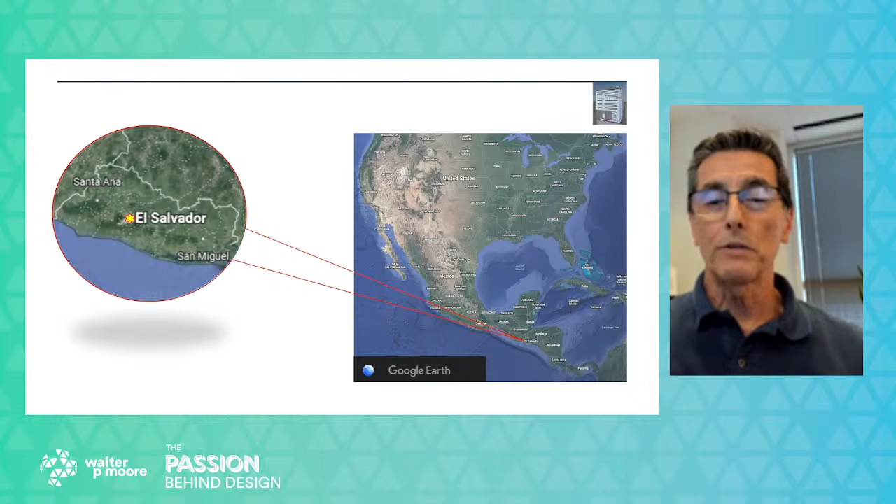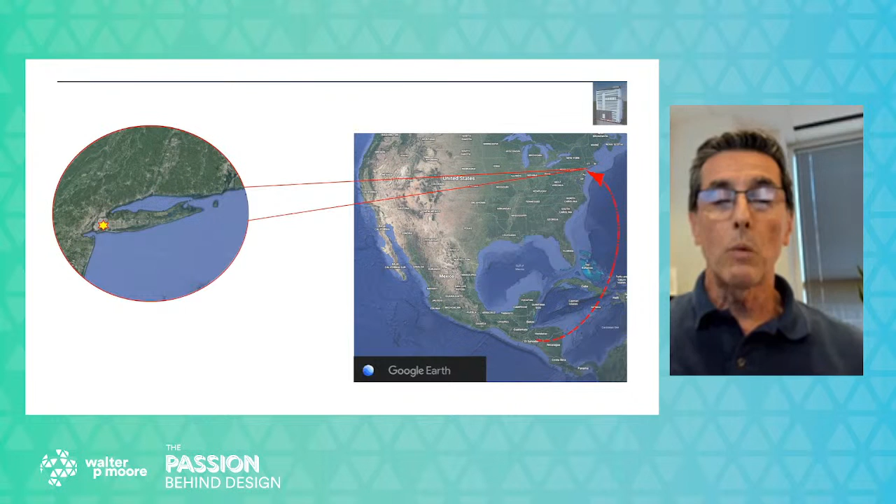Physics and math have always been of interest to me. My uncle once told me that math is the universal language. With math, one can describe and explain what happens around you. And that statement puzzled me. I was always, like I said before, fascinated with high-rise buildings, especially in New York. So after high school, I moved to New York, where I completed my bachelor's and master's degree, and was very fortunate to work in New York with great mentors whom I credit a great deal for my achievements. I worked there for close to 10 years.

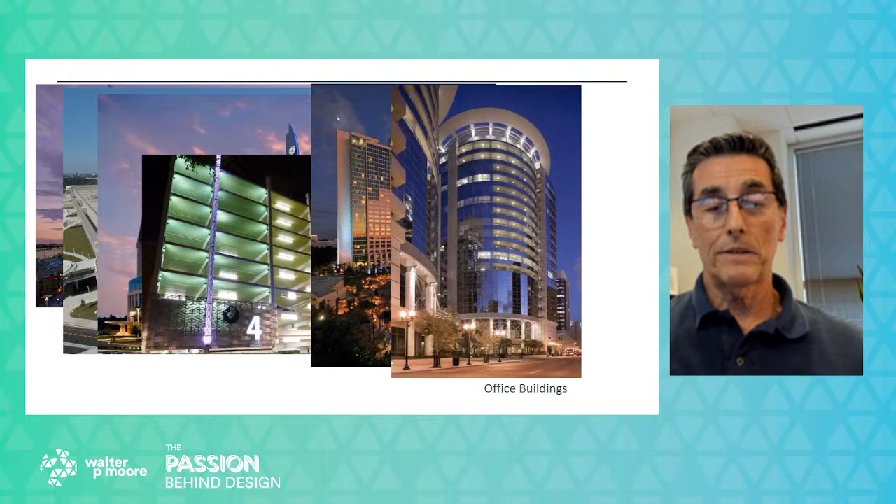And from there, my trek ended in Tampa, where I was fortunate to be hired by Walter P. Moore to work in the Tampa office. And 27 years later, I can still say that these have been the best 27 years of my career, designing buildings, doing what I love the most. So through the years, I had the fortune and joy of designing several types of buildings. I've designed sports arenas, convention centers. I've designed hospitals and healthcare facilities, parking garages, hotel resorts, and office buildings. And my collaboration on projects spans across the United States, Canada, Central America, Dubai, and Japan.

I often tell my children that when I see a project that's been completed, where I collaborated, it gives me a great deal of joy and pride. And I hope that if any of the students that are watching become engineers, architects, or contractors, they have the same sensation when they experience their work.

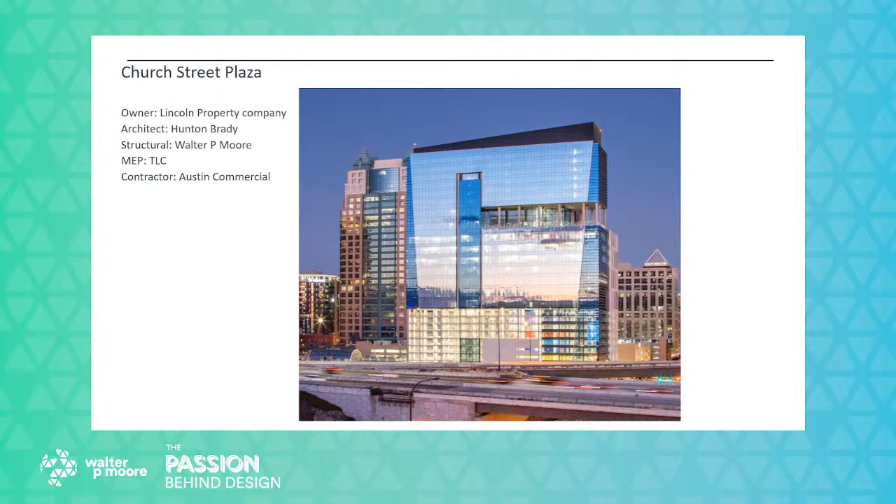This presentation is prepared specifically for the ACE mentorship program. For those of you professionals who are watching this presentation, it may be a little watered down to you, so please be patient and sit down. For those young, bright students interested in science and engineering, I have tried to keep the topic simple yet interesting, with the intent of sparking the curiosity just enough to consider following this path. The intent of this presentation is to bring awareness that we can solve problems, simple and complex, only if we channel our attention on breaking down these challenges into simple, basic, recognizable steps.

I'd like to give first, before we get started, special thanks to the team who helped deliver this incredible project. And I will start with the owner and developer, Lincoln Property, who planned the project, a company that understood the needs in the Orlando market and took a leap to deliver this project that is close to full occupancy now. Also, Hunton Brady Architects, who partnered with Lincoln Property and converted the vision into an exciting design and functional facility.

And also challenged the design consultants with this incredible puzzle. Walter P. Moore, of course, who collaborated with the architects and the other consultants to design the building skeleton that helps this icon stand tall and proud across the Orlando skyline. TLC, the mechanical, electrical, plumbing consultants, who in metaphorical terms design the blood vessels and the internal organs that make this building breathe, live, and light up.

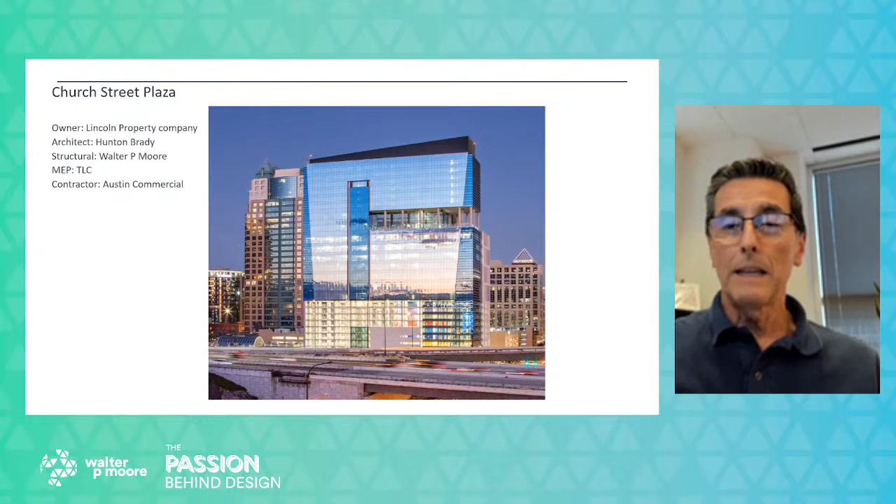And of course, last but not least, Austin Commercial, the contractors, who had the monumental task of taking all of our design solutions that were documented in drawings and computer models and converting them into what you see today in the Orlando skyline. Like I said, this is an exciting project delivered in a tight, constrained environment. The building's property line is only within about 15 feet of an active railroad track. And vibration from the train has always been something of a concern, especially when you build right next to it.

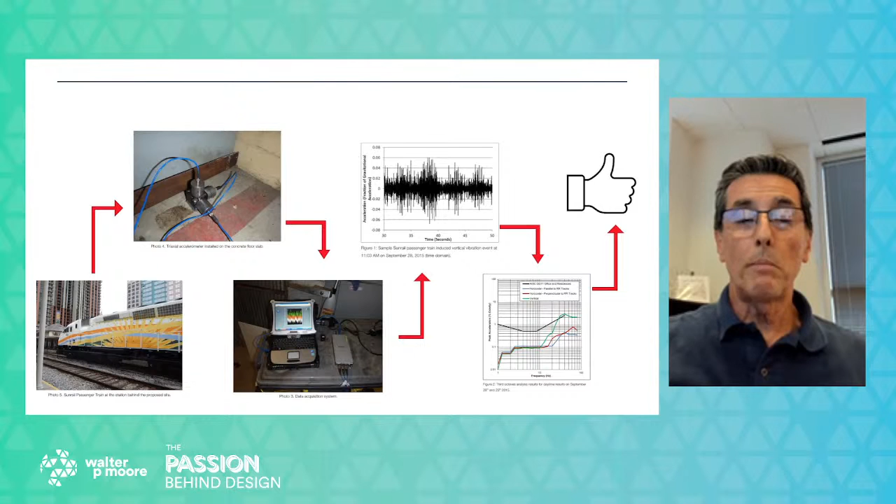So during the early phase of design, our forensic engineering group installed what we call a triaxial accelerometer. This is equipment that senses vibration in all three directions, and it was placed within the building footprint. The intent was to monitor vibration from the passenger and freight trains for several days. That information was compiled and fed into a data acquisition system that produced plots of those train-induced vibrations.

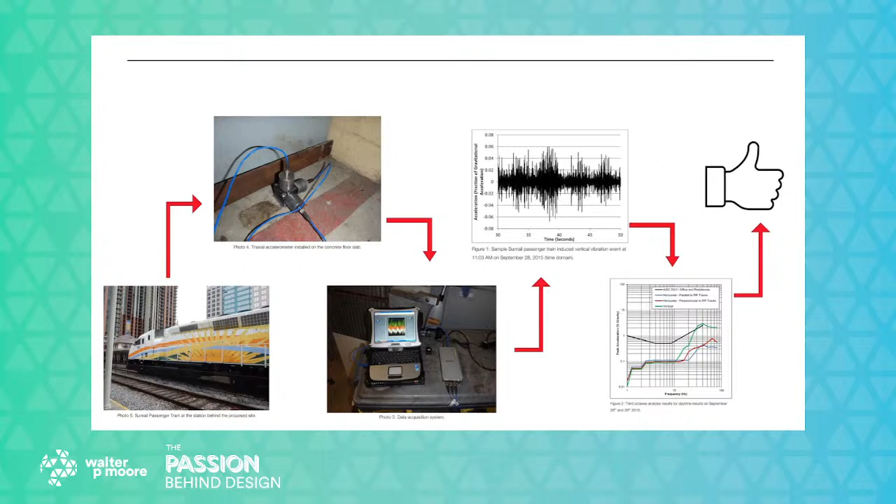And these plots recorded vibrations parallel to the train tracks, perpendicular to the train tracks, and also in the vertical direction. The plots, when compared against established vibration perception guidelines, indicated that this vibration would not exceed the threshold parameters that have been established as acceptable.

Another concern with the proximity to the railroad tracks was keeping the columns, especially the perimeter columns closest to the track, at a distance away from the train tracks in order to protect them from impact in case there were a train derailment. And there are some guidelines that are provided for designers. So those perimeter columns on the ground floor were set back approximately 5 feet in order to clear that derailment threshold. Then at the upper floors, from level 2 and up, the columns were moved back to the building edge. So we end up with ground floor columns that are out of alignment with the columns above, which is a puzzle that we will discuss later in the presentation.

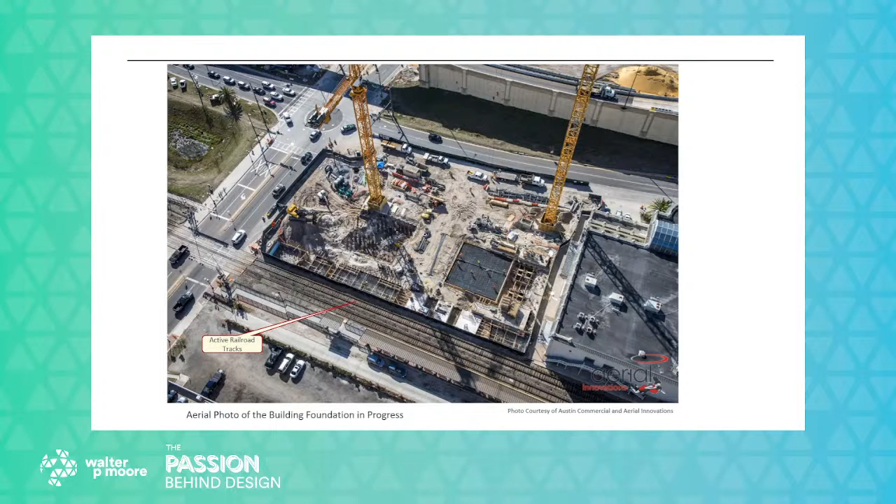So let's talk about the feature project and the topic specifically. Church Street Plaza is a mixed-use facility. This means that it serves different functions. On the ground floor, it has retail space, a bank, a hotel front desk, a cafeteria, and it will also have a future train station.

Then levels 2 to 9 have parking spaces. It has office space from levels 10 to 17. It has a hotel lobby, bar and amenities at level 18, and hotel guest rooms from level 19 through 26. And then at the top, there is mechanical equipment. So let's explore some of the distinct features of these functional spaces.

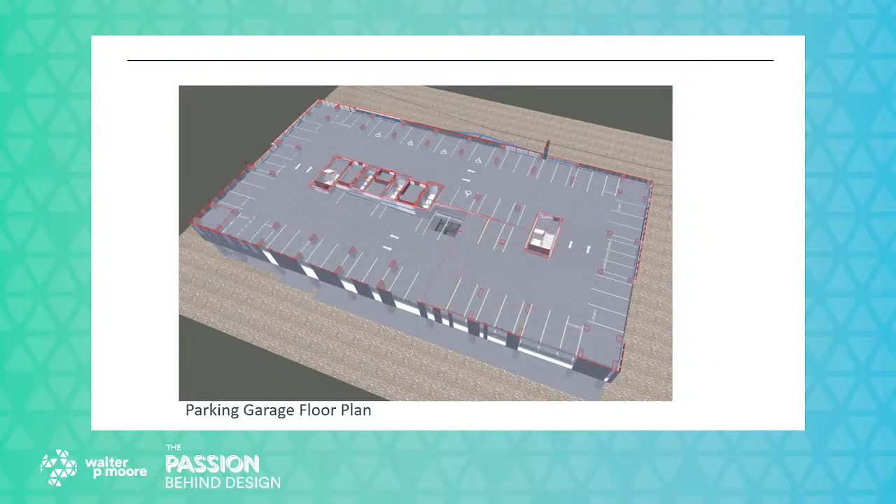Starting with a parking garage, the floor needs to have wide circulation spaces for the driving aisles, and that is a must. If we were designing just a standalone parking garage, those columns would want to be 60 to 62 feet apart. But because we are mixing different functions, there are some sacrifices and compromises that need to be made. But in order for this to work, the intent is to keep the columns as far apart as possible. Narrow columns also can help increase the number of available parking spaces. And of course, we need to have sloping ramps to access floors from one level to another.

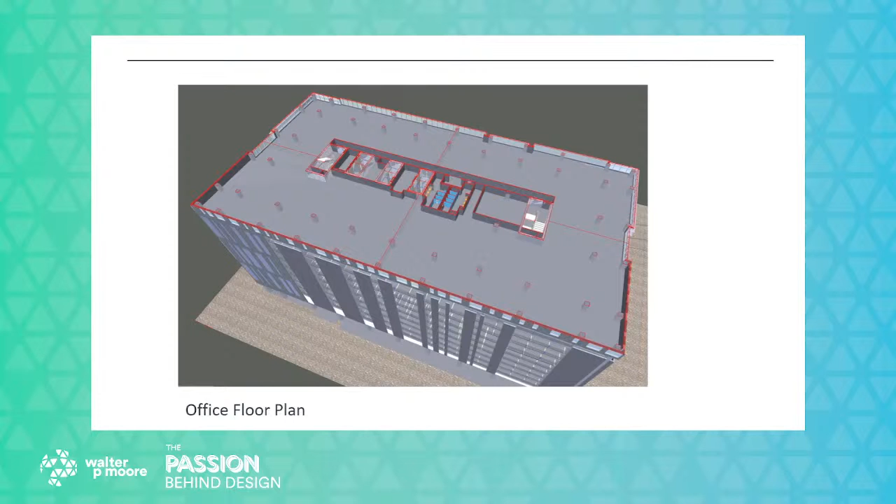Office spaces, on the other hand, don't work so well with long, narrow columns or columns that are close together. For an office space, you need to have more uniform column spacing. And of course, a hotel floor layout is different from the office space and parking garages. Narrower columns can help improve the guest room layout, and also the spacing for those columns will most likely be different from those of an office space or a parking garage.

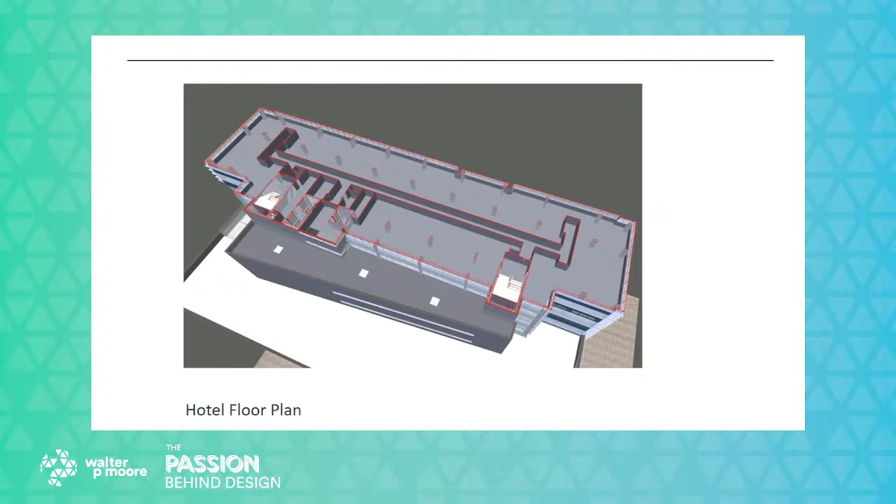So it's time for a quick question to summarize what we talked about so far. And while I do that, I would like to ask Annie to see if there are any questions from our viewers. While she checks on the chat, the question is, what particular differences can we find between parking garages, office floors, and hotel floors?

We learned before that for each of these spaces that have different functions and different needs, the efficiency is affected by the column size and their locations. Parking garages, we said before, will generally need to have their inner columns placed farther apart, whereas in office spaces they can be placed more uniformly. So we do have a question.

So it is, why did you move to Florida, and what are some of the challenges you face when designing buildings in different states? Okay, very good question. Thank you for that question.

The most important reason I moved to Florida, in addition to the weather, moving from New York to Florida, was that I had the opportunity to work for Walter P. Moore. And while I worked in New York, I had not heard much about Walter P. Moore, but a coworker of mine who had been working with Walter P. Moore for several years told me about the greatness of the staff, the mentors, and the type of projects that they were delivering. And so I was inclined to inquire, and I was fortunate to get that opportunity.

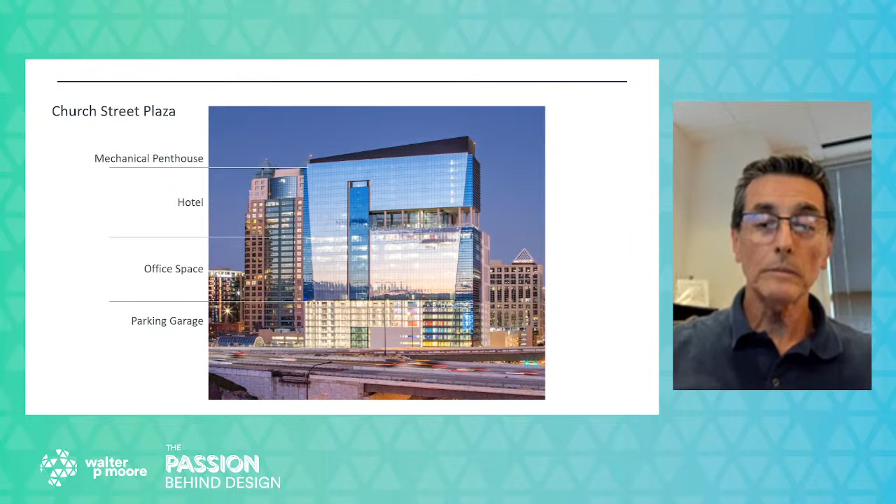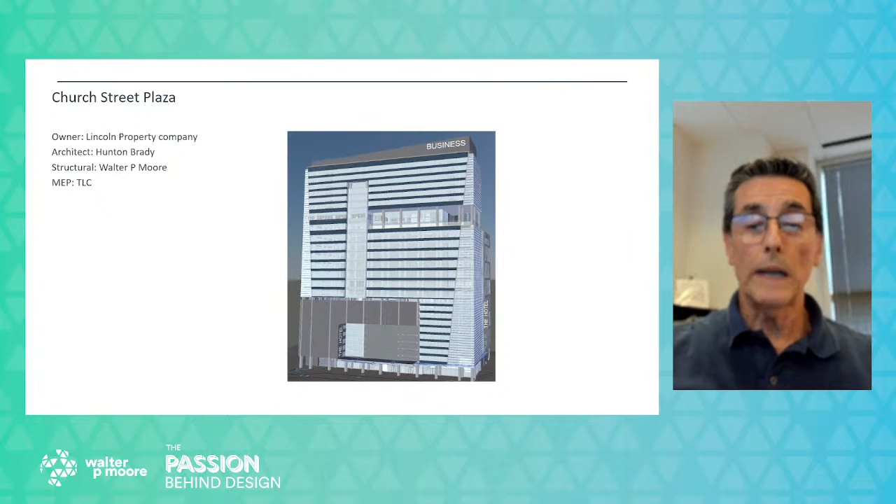So we admit that they are different. Like I said before, they look different, but something they have in common is something that we need to start looking for. Let's see if we can find some of those similarities. Let's see what they will have in common, and we'll do what I refer to as peeling of the onion, where we can start taking layers of the building to see if we can find those similarities.

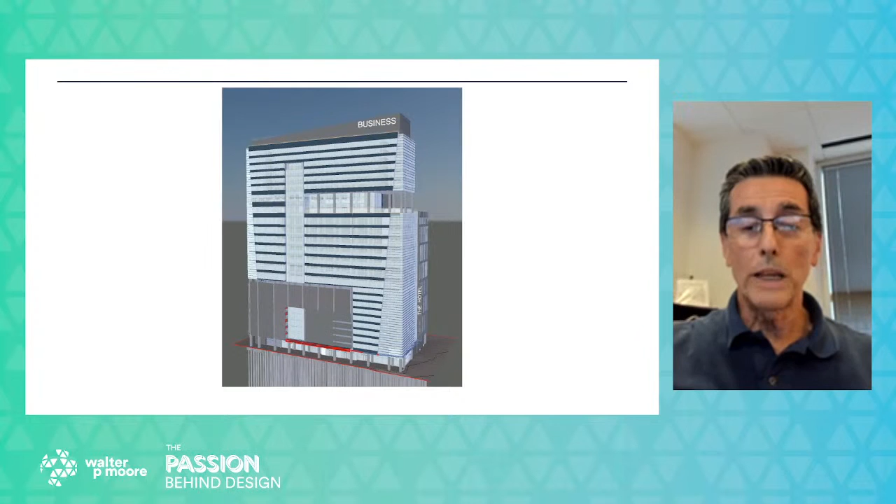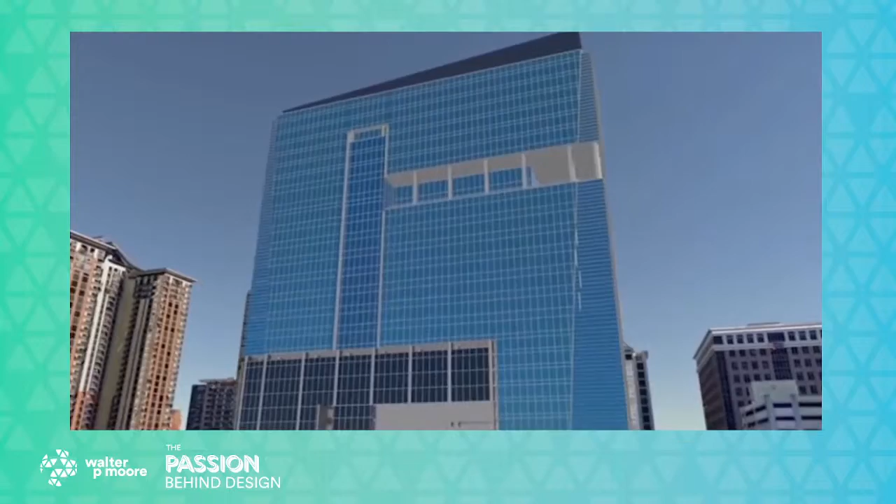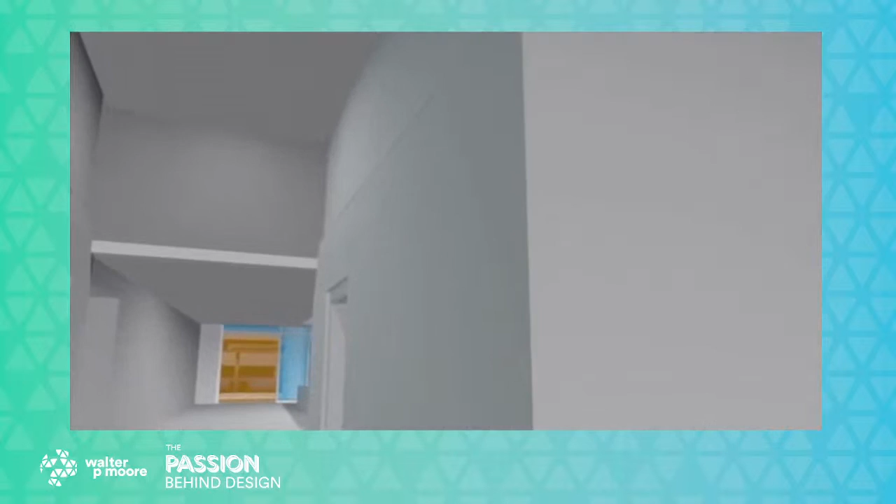And so even though they are unique buildings and serve specific functions, underneath all that architectural cladding, finishes, glass, walls, and all that, these building structures have a lot in common. They all have to perform similar jobs. And what job would that be? I would like to say that they are the backbone or the skeletons of the buildings, the structures that will keep the buildings from collapsing, give them rigidity, and make them stand.

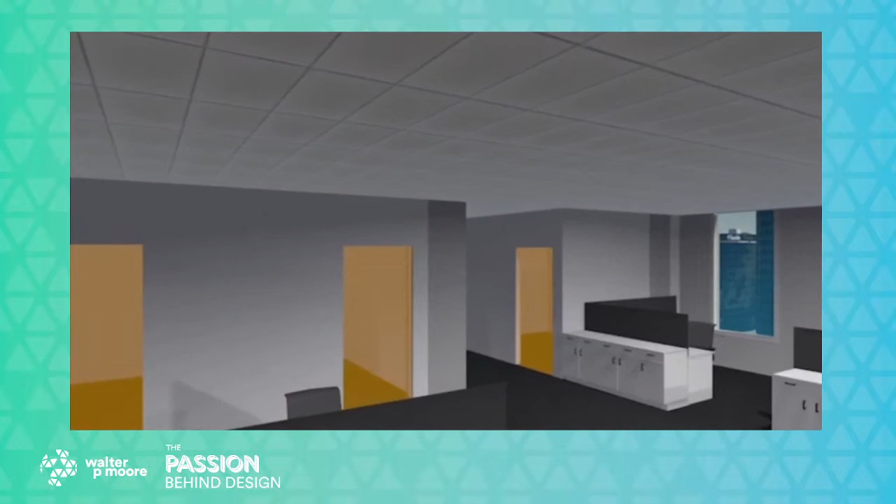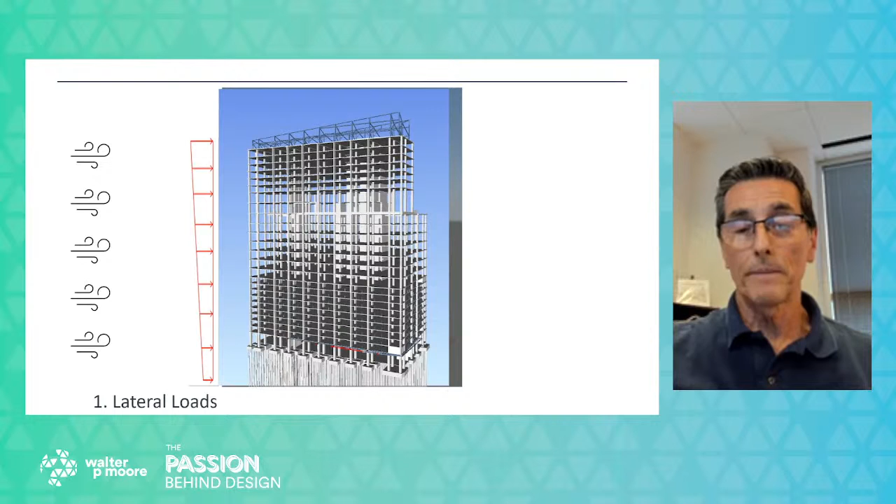Let's think about what else they would have in common. All building structures have to resist lateral loads. Those lateral loads or horizontal loads will be loads from wind, earthquakes, or from other sources. And for that, we rely on what we call lateral load resisting structural elements. These lateral load resisting systems are responsible for providing the building that lateral rigidity. These are rigid elements that have the ability to collect all those horizontal loads and bring them down to the lower floors and eventually to the foundations.

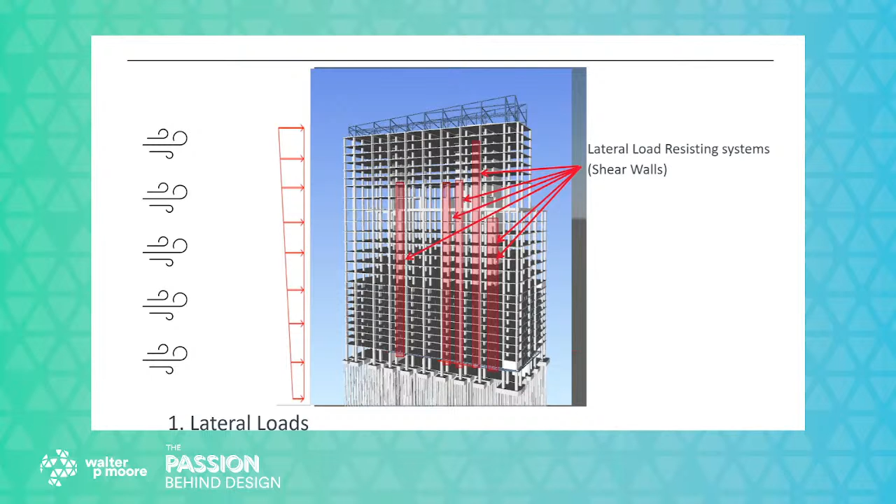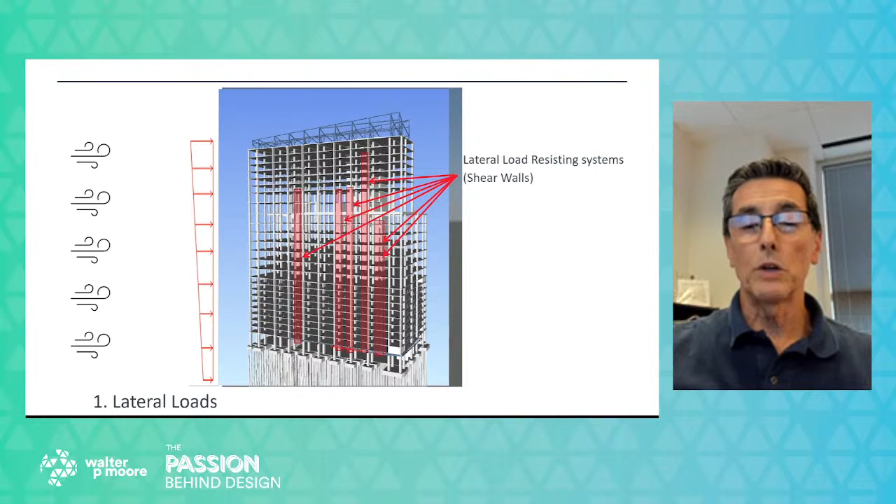These lateral load resisting systems can be shear walls, which are made out of concrete, and you would often see them in buildings around stairs or around elevators. They can also be braced frames or cross bracing, and those are usually made out of steel. Or they can be beam and column moment frames. This could be either steel or concrete. For this project, the lateral load resisting system consists of cast-in-place concrete shear walls.

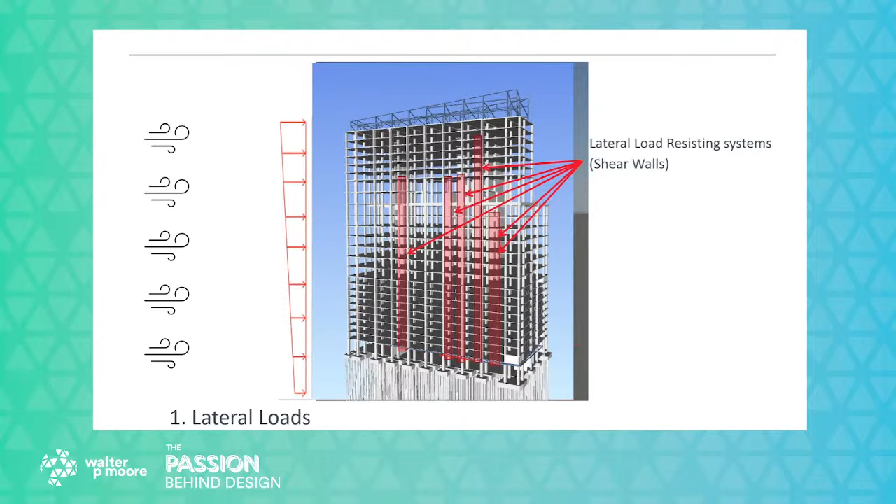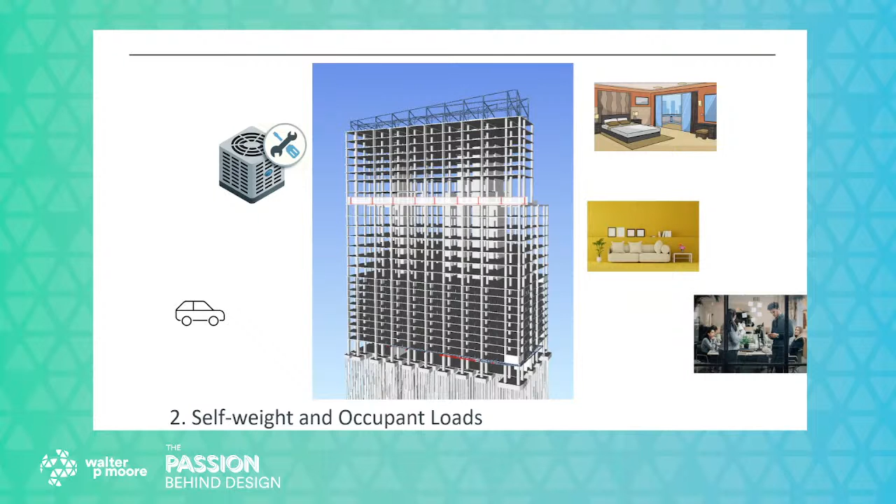Let's see what else these buildings and these structures specifically will have in common, right? Well, all building structures have to support the building self-weight and the occupant loads. And by occupant loads, I refer to the weight of people who would be in the building, office or residential furniture, cars, or anything else that will be stored in the building.

And for that, we rely on what we call gravity load framing systems. Examples of this will be columns in the building. It could be beams, which are the horizontal framing elements that span or go between columns, and also the floor slabs.

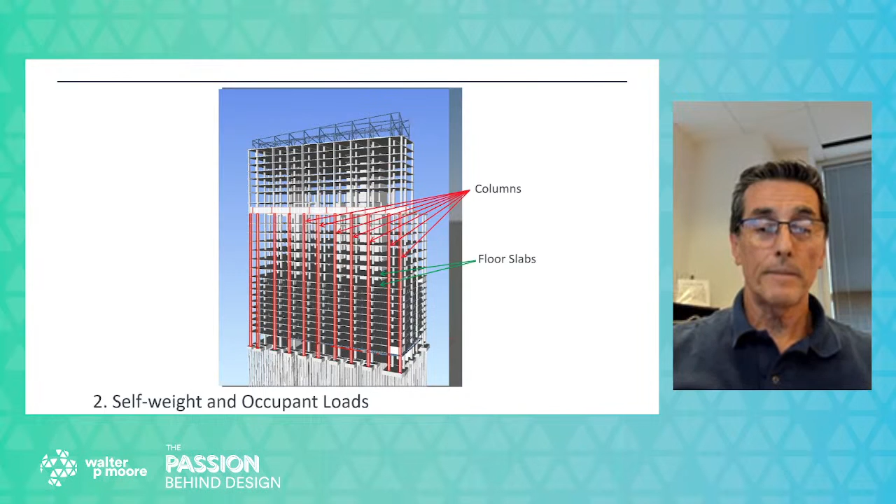What else could we say that these structures have in common? And this one, for me, and I guess for other structural engineers, is very important. And that is that all buildings and all structures need to have a defined load path. And what do I mean by that? Defining a load path means to identify a continuous path that the loads, whether they are applied externally by wind, earthquake forces, or the loads that are applied internally by the occupants, must take to get down to the foundations.

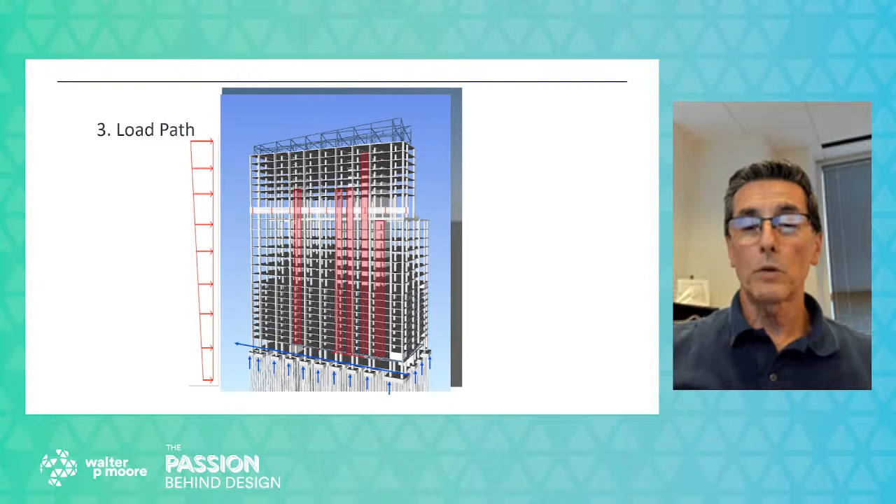And that load path is the roadmap of how you envision all these forces, the wind forces, the earthquake forces, building weight, and all of that, how you envision those loads will travel from where they are applied all the way down to the foundation, which is their final destination.

And last but not least, we have to establish a balance between economy and safety. The building has to be functional, that is, it has to serve the intended purpose, but it also has to be safe and it has to be within the building owner's budget.

And with that, it's time for another question. And while I do that, I'll ask Annie again to check and see if there are any questions from the viewers. And the question this time is, what do the structures of these buildings have in common, based on what we talked about before?

And I will say that all these structures for the buildings, regardless of the function, are the backbone of the buildings or the skeletons. They all have to resist the lateral loads or horizontal loads. They all have to support the self-weight. There has to be a load path in the structural system, and there has to be a balance between economy and safety.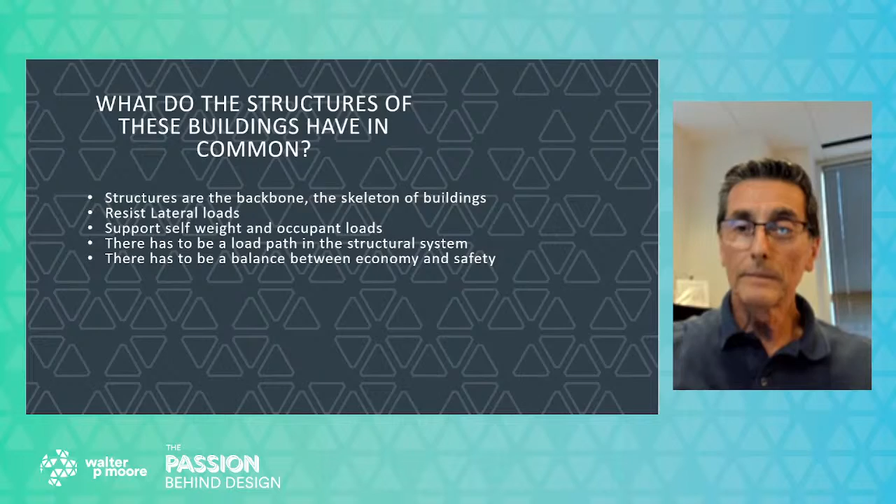Okay, we do have a couple more questions. One of which, when I first started at Walter P. Moore, I was very interested in learning about, and that is, what are shear walls? Yes, I'll explain it here briefly, and then we'll touch on it later in the presentation. But in general, shear walls are solid concrete vertical elements that are used in buildings to gather all the horizontal loads that are applied to the building, say wind loads. They have to be collected, right?

The wind is applied to the building skin, the exterior walls. The exterior walls will lean against the building floors. The floors will in turn push against something. Something has to prevent them from being unstable. And that something in most cases is shear walls. So shear walls would be the solid elements. Think of them as a tree trunk.

You know, if you see a tree in the woods and you see branches that are flapping around, wind blows on those branches, right? And the branches will sway, but they're attached to the trunk. And the trunk, in our case the concrete shear walls, will collect all those loads from where the branches connect, and that load is collected down and it goes down to the roots of the tree. And the roots of the tree are what keep the tree from toppling down. In our analogy, the foundations will be the roots of our building that will keep it from turning over.

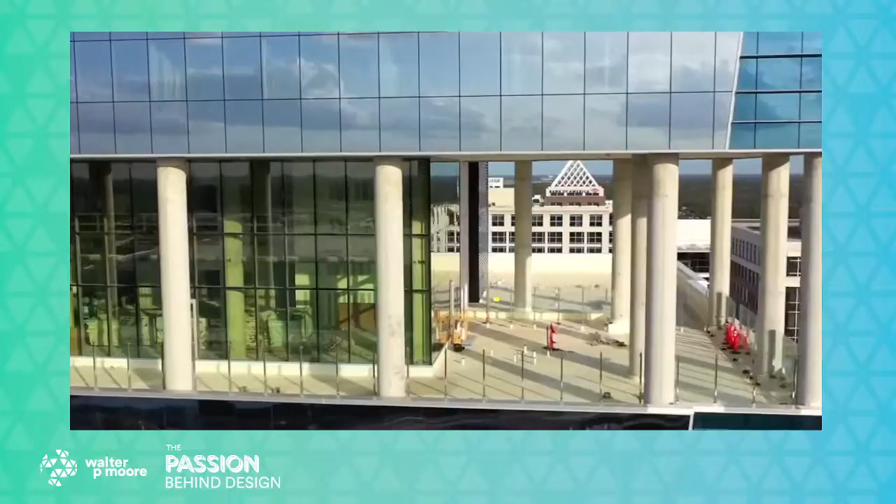Yes, a very good question. I'm glad the question was asked. The answer is they all have to be designed together because they will function together. However, there is, I would say, a pre-design, and I'm going to call it a conceptual phase of design, where there will be collaboration between the owner, who has the specific needs for the building, right?

The owner wants so many thousands of square feet of office space. He needs to have a hotel that would have several hundred guest rooms, and the building will need to have parking spaces. And so it is, I would say, not a tug of war, but it is a give and take a little bit to trying to find an optimum layout for the building, right?

So there are studies that will be done by the architects where they would do an office layout. And with that office layout, then there would be a preliminary study of where the columns would need to be. And then based on where those columns would fall, one would compare, and here is where the structural engineers will come in, would compare and try to define where the columns will need to be in order to support the columns from the second component.

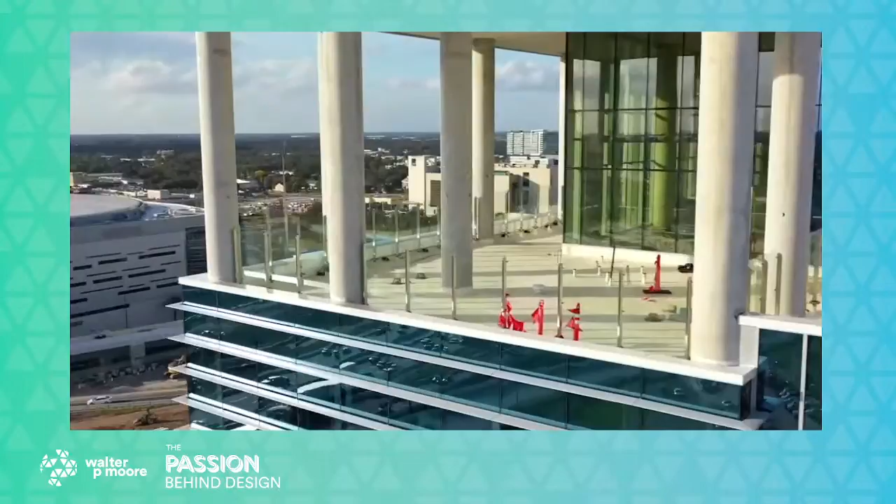And then when that happens, we have to evaluate if the column location that was discussed will be functional and if it will optimize the parking space layout. So there is give and take until a reasonable column layout and grid layout is defined. And once that is defined, then we look at the building as a whole. We don't look at the independent components, right? We just piece them together.

And then as we piece them together, we look at the load path, making sure that the head bone connects to the neck bone and all that, so that it goes down to the foundation. And then we start looking from a general perspective: load is applied, how will the load travel down? So it is looked at as just one component.

Okay, thank you. And that's it for now. So we can continue on with the presentation. Thank you.

So now in our case, we said we have a mixed-use facility, right? And mixed-use facilities have to do the same that we described before, like the other buildings, right? They have to collect lateral loads, downward loads, load path, and all of that. But in this case, there will be some complications, and those complications will be because of the fact that we are stacking building segments that have different functions.

And this is sort of getting into what I was discussing earlier, right? We will encounter columns that are not aligned with those of the lower levels, and we will see that each of these segments' needs will be different, and they will have different space layouts. The same column spacing will not work efficiently for all the needs.

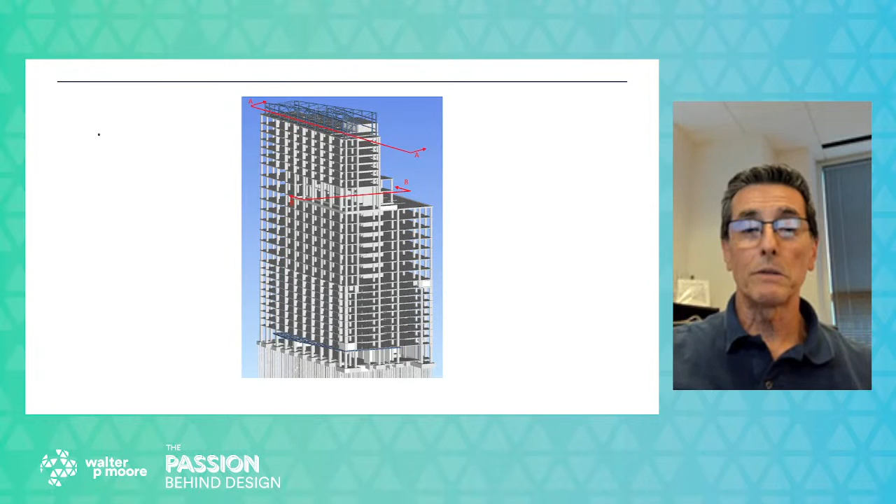So let's take a closer look at the puzzle so we can find how the pieces of this puzzle will fit together. We have on the screen two sections or two views. Section A, or view A, is a section looking at the long face of the building. The section looking that way. In section B, we're looking at the short side of the building, looking in this direction.

So when we look at them, we can see how the spaces transition from, and I don't know if you can see my cursor, maybe not. Can you see my cursor? Yes.

So we can see where parking levels transition to office levels. There we will see there are columns out of alignment. You can see that in section B on the left side. You can also see how when we go from office spaces to the hotel spaces, the stair walls, which in this case we are using as shear walls, are offset and do not align. So we have to deal with this puzzle as well.

If you look at section A, you will see how, and it was mentioned earlier, for a hotel space the column layout and column needs will be different. So in this case, we have columns that start at the top guest floors, but they stop. And we have to deal with that as well, because extending that column to the office space would not be functional. So these are some of the challenges that structural engineers will need to solve, but we need to find efficient solutions for this puzzle.

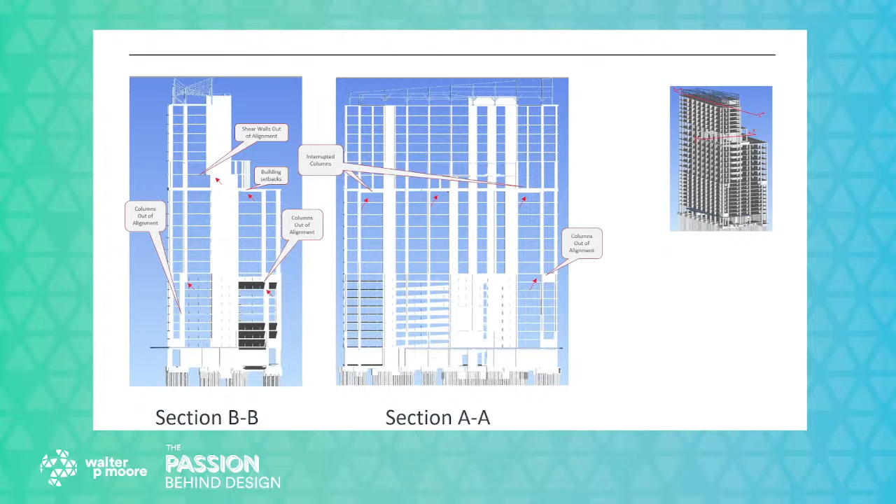And for that, we will take a look at one of these challenges. There are so many, but this is just to give you an idea of what the thought process is while designing buildings of this nature. And so to do that, we will look at the transition between building components that have different functions. Let's see how the parking garage transitions to office space.

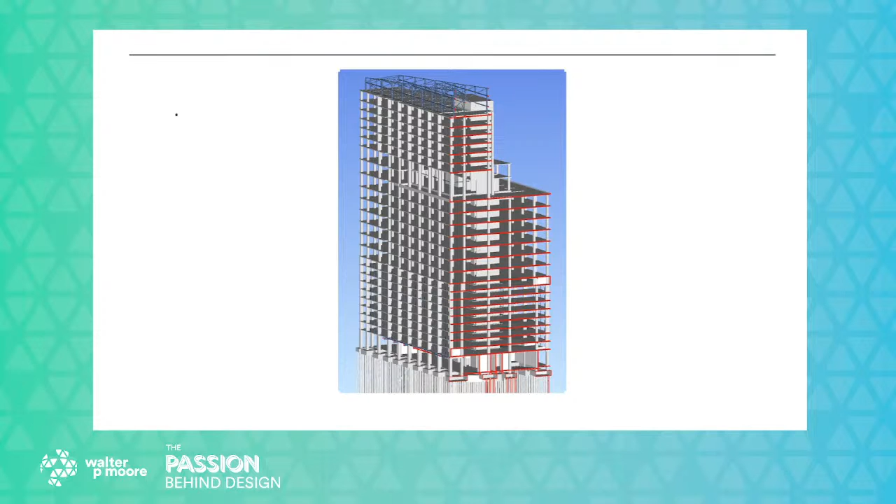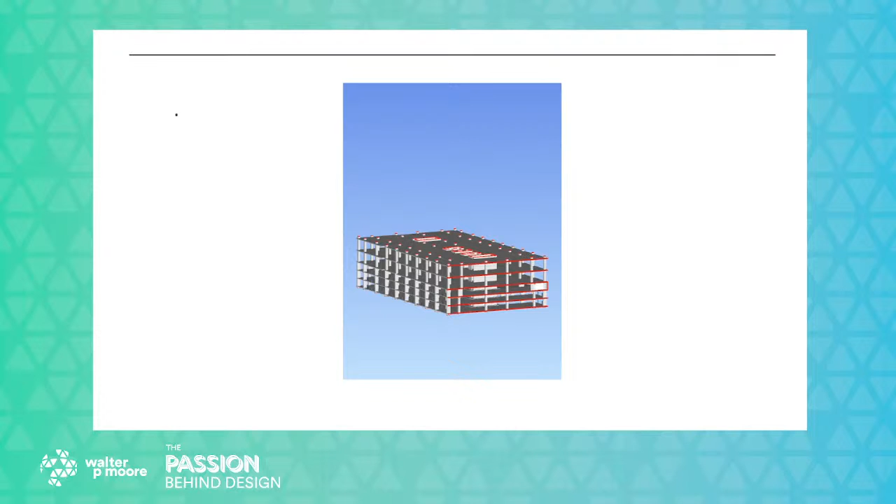And for that, let's chop off the top floors. And we will also chop off some of the bottom floors. And we will isolate columns that will shift from one position to another. This here is a column that transitions from a parking garage floor to an office floor, right? And I hope you can see there that the columns on the parking garage are shifted closer to the left edge of the building, whereas in the office floor, the column would work best for office space layout if it were shifted to the right.

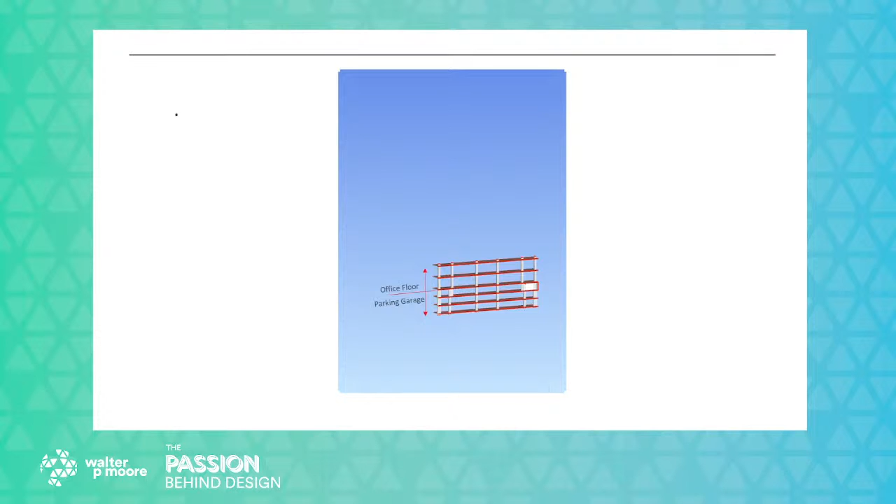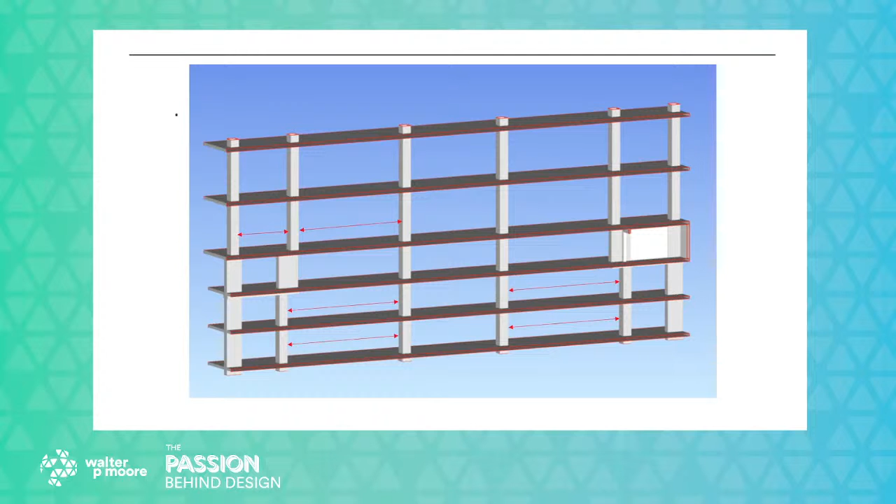Right? And that is because parking spaces, as we said before, will benefit from having wider circulation spaces. So the first thing we notice with the column misalignment is that we need to provide some sort of equilibrium. And by equilibrium, I mean prevent anything from moving or shifting, making sure that the loads pushing down are resisted and it's not making the building tumble or pieces go out of alignment, right?

So we have the red column that is to the right, and below it, we have what I will call a transitional column segment, which is a segment that we use so that we can transfer load from the right or red column above to the blue left column on the bottom, right? But when we do that, we notice that there is some misalignment, right? The loads from the column will have a tendency to make that transitional segment rotate, right?

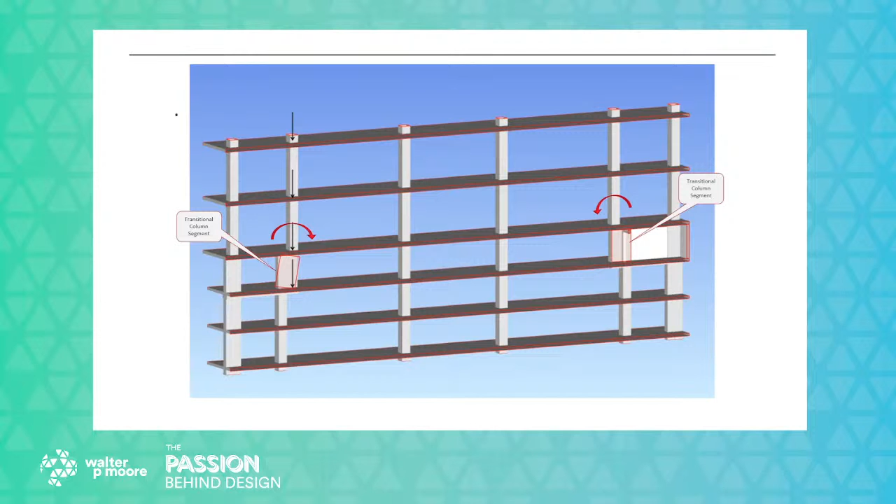You can practice this at home: grab a book, put one finger simulating a support on the lower left-hand side and push on the upper right-hand side. Can you keep it stable? It is unstable. And so we need to find a way to prevent that rotation. If we don't, there will be rotation unless, and before I proceed with that, we'll take another pause and I'll pick up on the unless shortly.

And I wanted to give Annie another chance to see if there are any questions from the viewers while I present this other question. So the question I'm asking here is, why do you think we need to stop column rotation? Well, I believe that we need to restrain the column in order to provide structural stability. We need to restrain that column to restore the equilibrium, and we need to restrain the column to prevent building failure.

Okay, we do have another question. Yes, Annie. They look like very slim slabs. Say that 5 times fast. Yes. Did that add a lot of complexity to the design process? Yes, it did add complexity, and it was a conscious decision, and I will touch on it later in the presentation, but I don't want to leave the question unanswered. The main reason for making the floors thinner, which adds a little bit of complexity, but just want to clarify, is complexity that can be addressed efficiently. Right? So making the floors thinner will reduce building height.

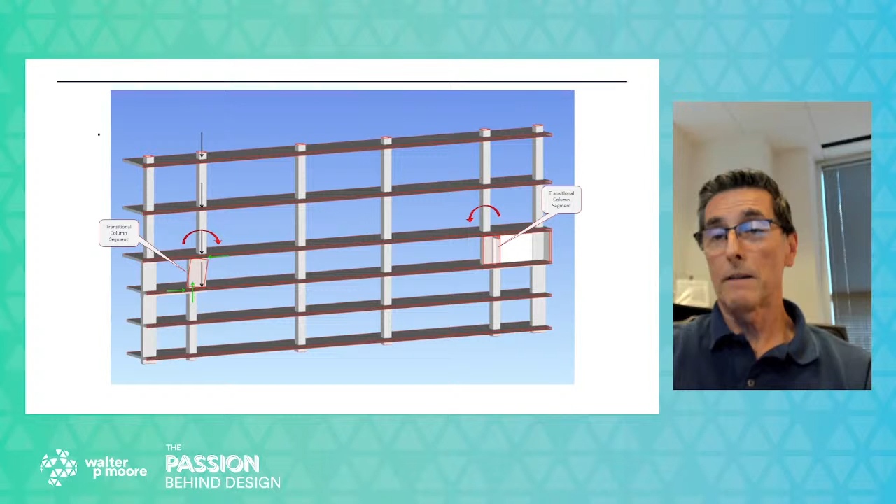When you look at the lower floor as well, the lower floor is rigidly attached to the bottom of that segment and the column on the lower left-hand side. And that rotation is prevented because the floor will not let it happen. And in doing so, we can provide equilibrium, but we don't stop there. Now we have forces on the floor, and we need to find where and how those forces will go so that we have satisfied that there is equilibrium in the building.

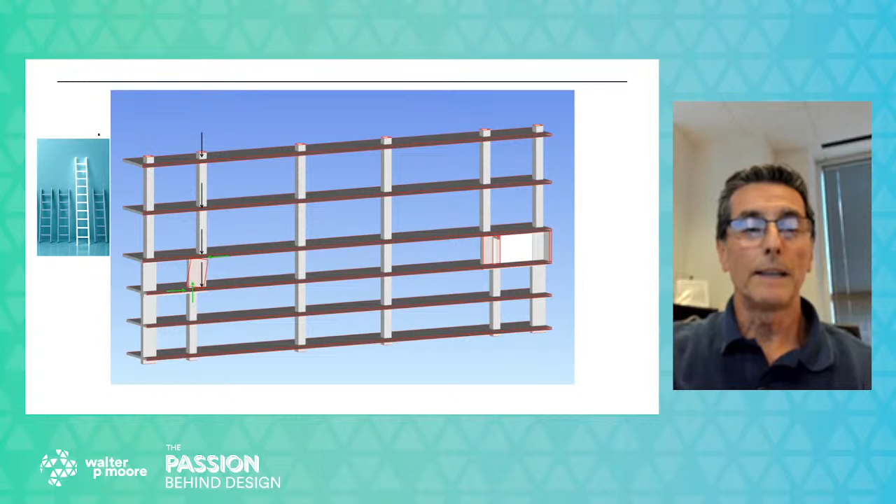I'd like to take just a minute or so and illustrate this equilibrium. Think of a ladder. When we have a ladder, we lean it against the wall. And the ladder is stable because the top portion of the ladder is pushing on the wall. The wall is providing that lateral restraint, not letting the ladder fall. But if you take away the wall, then there's nothing stopping the ladder, and it would just fall to the ground.

So that's what we're seeing in the previous segment that the top floor is doing to the top of the column. In the same manner, at the bottom, we have the floor and we have friction between the bottom of the ladder and the floor that is preventing the ladder from slipping, unless we have a wet floor and we have no friction and no stability, and we would have failure. And so the floor and the wall are doing the same job that the top and bottom floors are doing in the previous slide.

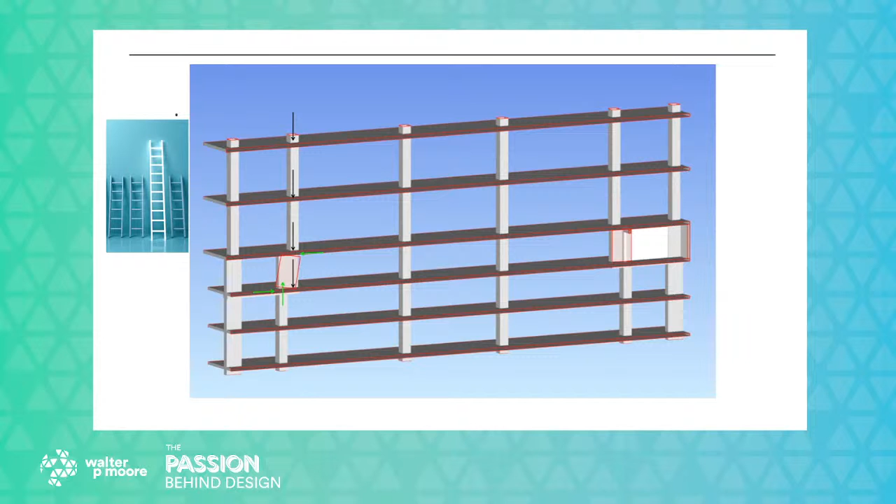So the next step then, like I said before, is to see how these restraining forces will travel down to the foundations where they all need to be collected and resolved. And to do that again, we'll take a look at the building and we'll take a slice. Again, we cut off the top, and we will also cut off the bottom, and we will leave two floors in this case. And then we take a closer look at what is happening, not only on the one column, but on the rest of the columns on this side of the building.

We talked about each of these columns wanting to rotate, pushing the floors, and the floor doing its job, just preventing that from happening, just being pushed against. And so in order to track where the load is going, we see that this floor is attached to the concrete walls, to the shear walls, which are the stair shafts and the elevator shafts. So the floor itself is leaning on the shear walls. And that is establishing part of the path that this force will need to take.

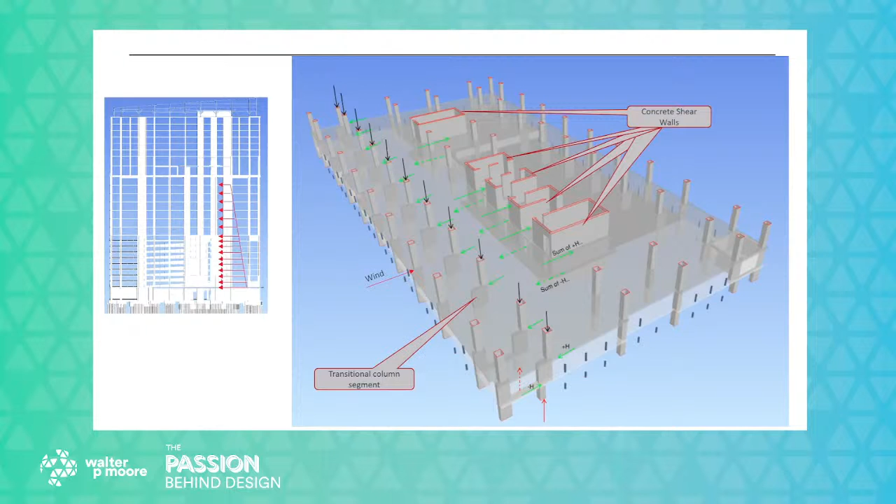Next, I would like to talk about the building height, and this will touch on the important question that we got from one of our viewers. Right. For the building height, I would like to say that the height has a significant impact on the construction cost.

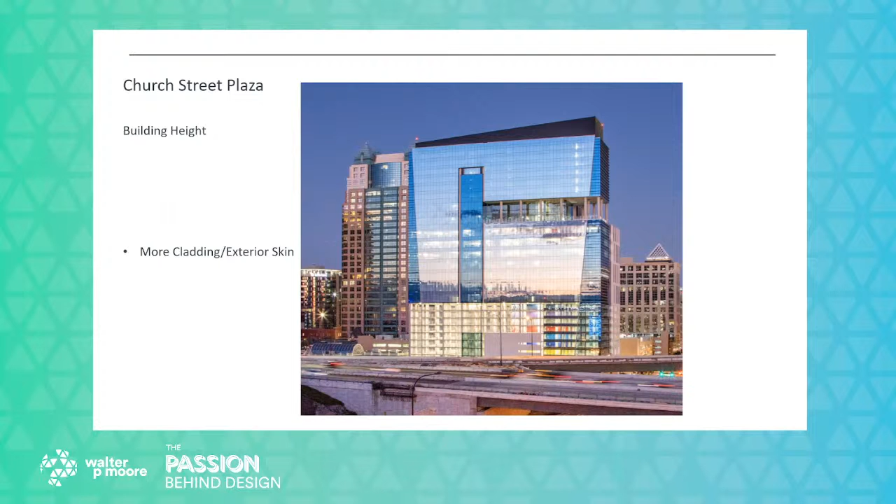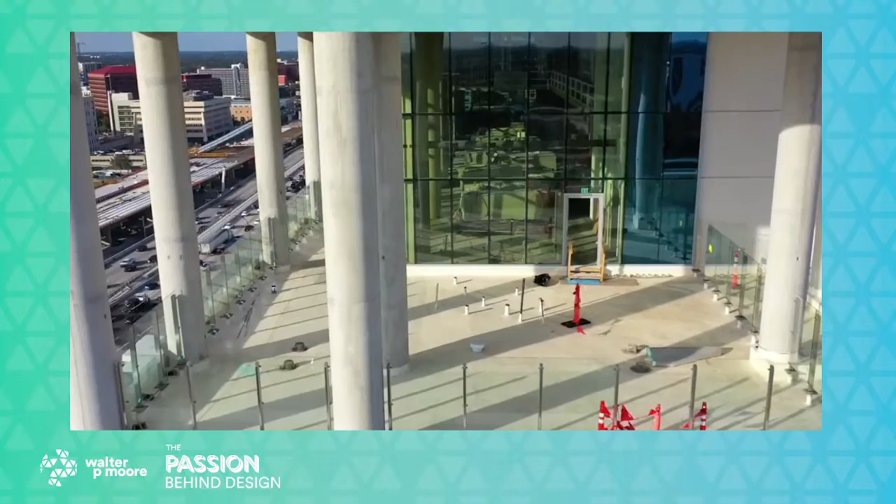Taller buildings, of course, will need more exterior cladding. And by the cladding, I'm referring to the pretty glass windows and glazing system that surrounds the exterior. So the taller the building, the more surface you have, the more expenses that need to be incurred in order to clad the building. In addition to that, taller buildings will have larger volumes of interior spaces that will need more heating and more cooling in order to maintain controlled temperatures. So that is an additional expense for the larger spaces in taller buildings.

And in addition to that, a taller building will need longer columns, longer concrete walls. So there will be additional costs that need to be considered. So now I'm going to elaborate a bit on the question of why not beams and all that. So we did say that as engineers, we have a choice of recommending what sort of framing to utilize. Right? The key is always selecting and recommending the framing system that works best.

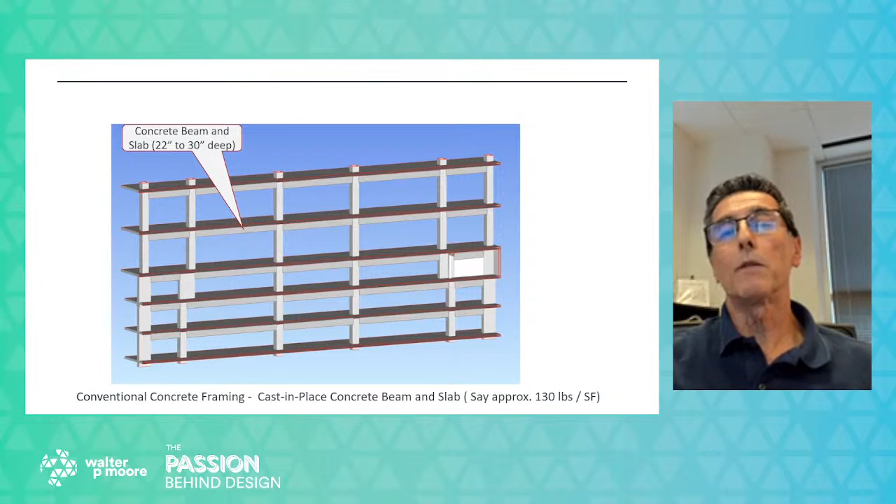In the conventional framing system, we could have used floor and beam slabs with depths of 22 to 30 inches. And for that framing system, if you take an average weight of the floor, it would be something in the order of 130 to 140 pounds per square foot of floor space. Beams, of course, work well because, if you're not so familiar with engineering, the rigidity of the building is proportional to the square of the height. So, of course, having deeper floors will prove to have more rigid supporting elements. However, there is what we call post-tension cast-in-place concrete, where you can compensate for that and still make the buildings functional and also economical.

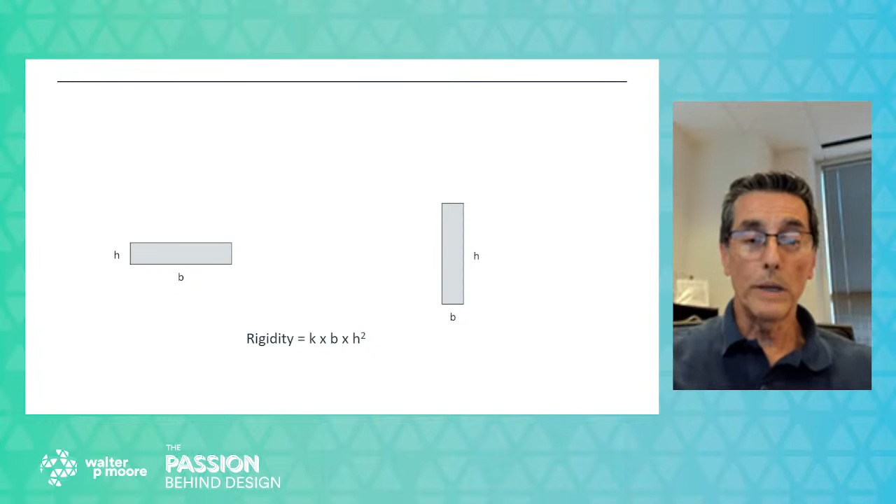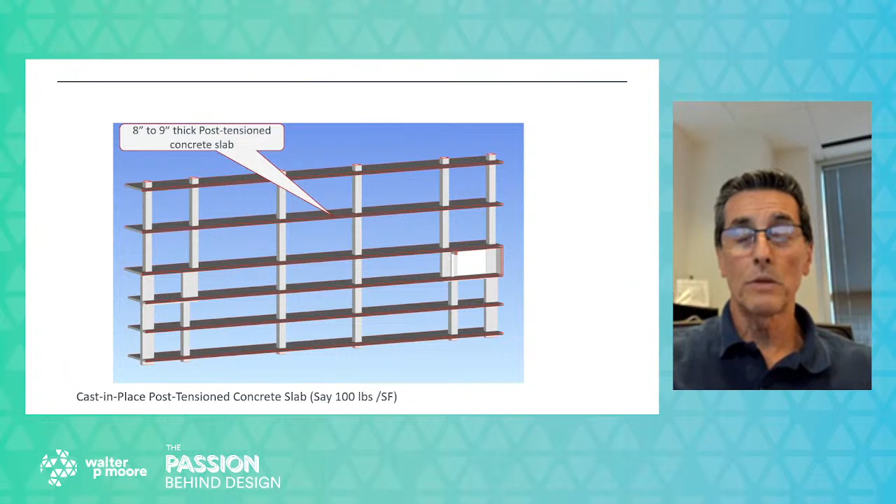So in our case, as mentioned before, we use 8 to 9 inch thick post-tension concrete slabs, and the floor self-weight was in the order of, say, about 100 pounds per square foot. So we have 30 pounds per square foot of floor space difference. The building total square footage is close to 600,000 square feet. So do the math, we're saving 30 pounds times 600,000 square feet. So that would be additional weight that the columns will need to support, and additional weight the foundations will need to support.

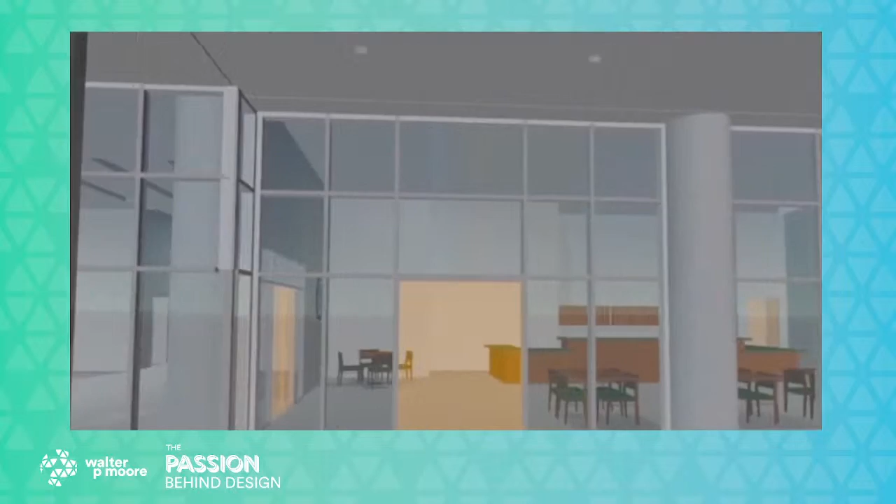Right. So by using the thinner floor slab framing, the building height can be reduced on average, say 20 to 21 inches per floor. And we have 26 elevated floors. So if we do the math, 26 times 21, that will be close to about 45 feet. So we are going to be shortening the building height by 45 feet, right? And we could say that compared to a conventional cast-in-place floor slab and beam system that would have been 45 feet taller, when using the thinner slab, there is approximately a 14% reduction of exterior building skin.

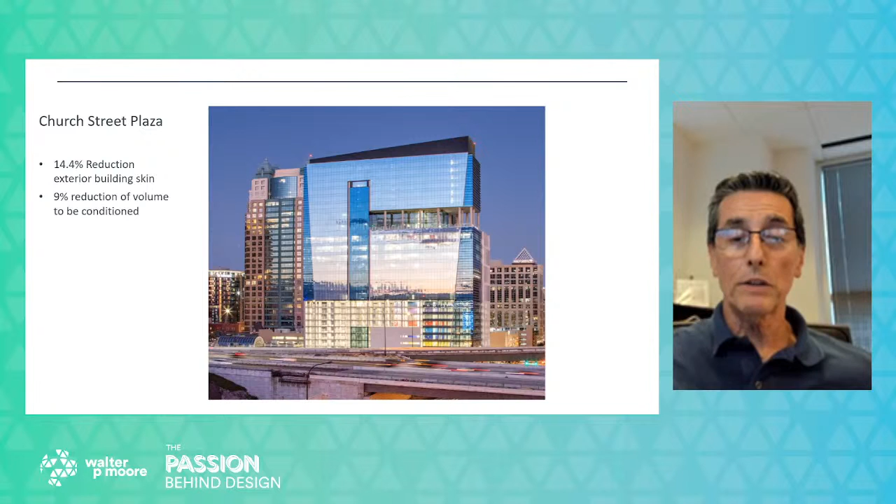Exterior cladding can vary from $50 to sometimes even $80 to $90 per square foot. So there are substantial savings there that can prove to be more efficient than having a taller building. In addition to that, the shorter building will see a reduction of volume of space to be conditioned of roughly about 9%. So that would save on heating and cooling and electricity as well. And in addition to that, there will roughly be a 23% reduction of the building slab self-weight, which in turn will reduce the foundation loads.

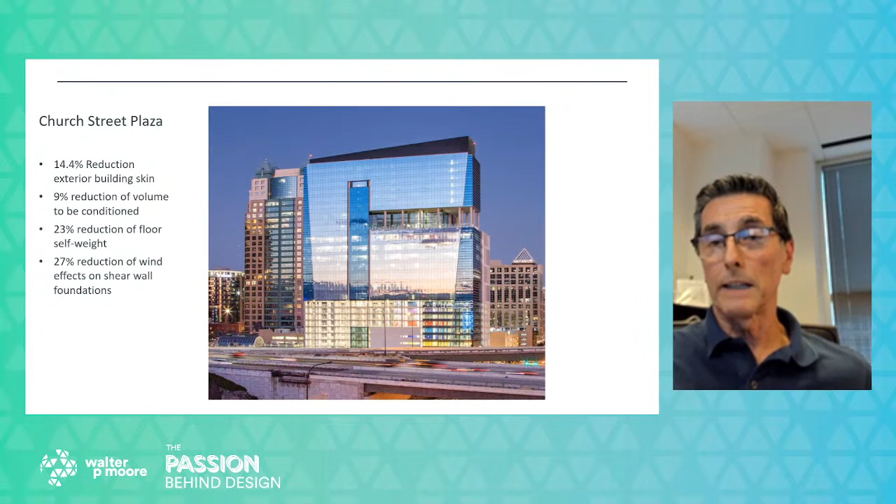And this reduction in building height also reduces the height of the building that will be exposed to wind. Lateral loads on foundations increase exponentially. That is, the taller the building, of course, there is more wind, but the impact is proportional to the square of the building height. And so in our case, for this building, the reduction in building height resulted in a reduction of roughly about 27% of the wind effect on the shear wall foundations. So it's worth mentioning also that less concrete will also mean less carbon footprint. And I think we had a presentation that talked about that in the past.